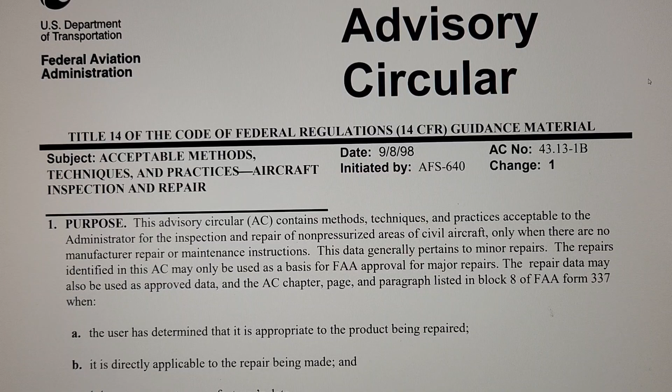All right, so back in chapter 11, they talk about ampacity and, oh god, what's the equation? I'll sketch out the equation in a second here on a separate piece of paper.

All right, so I managed to find a piece of paper where I could write out the equation for the resistance of a wire. So resistance in ohms divided by its length - this is resistance per unit length. That's the Greek letter rho - looks like a fancy P, but it's rho. That's the resistivity of the wire.

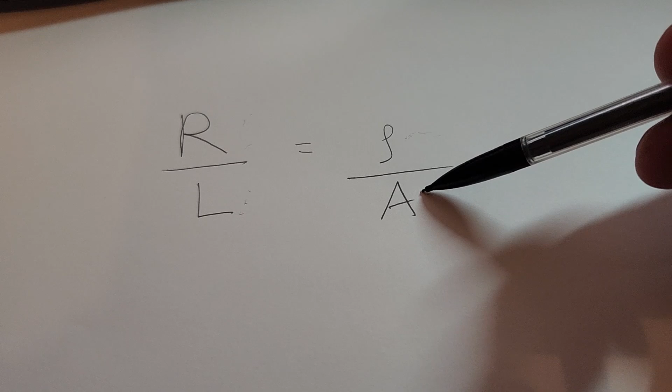This is what the manufacturer should be able to tell you. This is the cross-sectional area of the wire. You can try calculating this yourself, but what a lot of manufacturers do - because this is actually a lot easier for solid core wire, for stranded wire it's not as easy - is instead of giving you the resistivity, they'll give you resistivity divided by the cross-sectional area, which is actually the resistance per unit length.

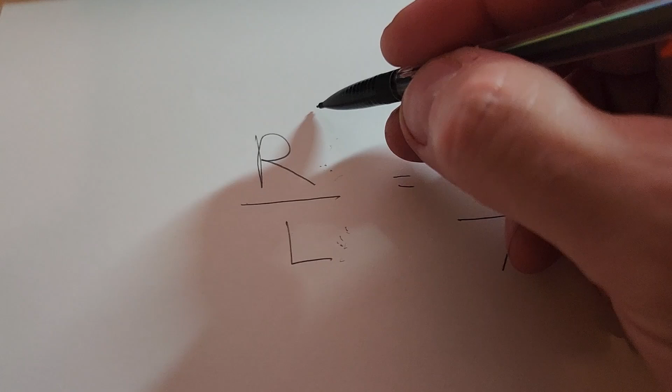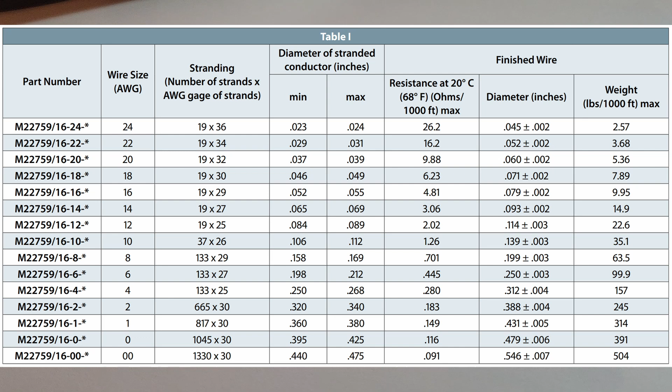This is the number you're going to probably get from the manufacturer for your wire. They'll say, hey, resistance per unit length for 8 American gauge wire, they'll give you another resistance per unit length for like 6, and so on and so forth. They're probably not going to give you the resistivity number directly, because it can sometimes be hard to figure out. So they will do their own testing and give you a resistance per unit length for a specific wire gauge, and that's what they'll typically report. All right, that's enough about that.

And then there's some corrections you can do for temperature, and then there's some other corrections you can do for wires in a bundle, and also wires that are not at sea level. So as you go higher up in altitude, the air is thinner, so the air has less ability to convect heat away from a wire the higher up you are. Not normally a problem for road vehicles, but certainly a problem for airplanes.

All right, let's talk about the battery I'm building. So yeah, quick refresher - we're on the 14 volt system. This tells us the wire length we can, well, it's not to exceed this wire length. This is the wire gauge, and these lines are constant current lines.

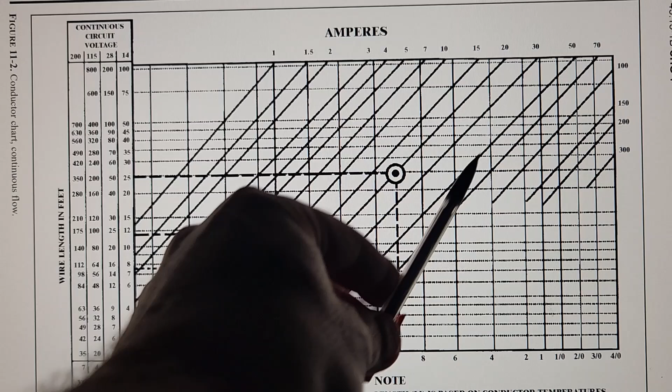So I've got about 3 feet round trip from positive and negative. If you want, you can call it 4 - I think you'll see it won't matter. And here's the 200 amp line, but remember, I've got 4 wires, cables coming off of the positive, 4 coming off the negative, 2 per cell, and I've got 2 cells in parallel, so that's 2 times 2 is 4.

So instead of 200 amps, I'm really on the 50 amp line for evaluating, do I have the right length? So let's follow the 50 amp line down to the 4 foot, and yeah, it's roughly the gauge wire I would need is about 13 gauge, which doesn't exist, so you would use 12. I've got 8, and so 8 at 4 feet - that's that intersection right there. How much current could I really draw through that?

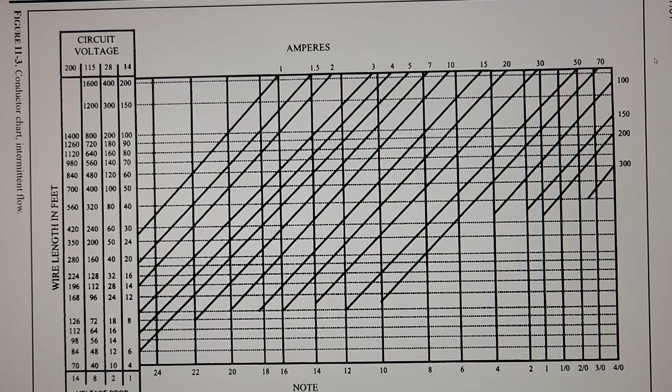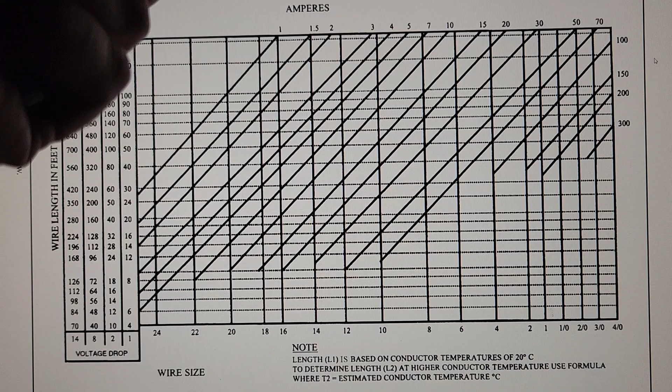So if you go to the next chart, this one's going to be intermittent flow. So this is going to be more of the peaky current, whereas the peaking, it'll just be a temporary spike, and then it comes back down to the average load. The average load is that previous chart. So yeah, 8 gauge.

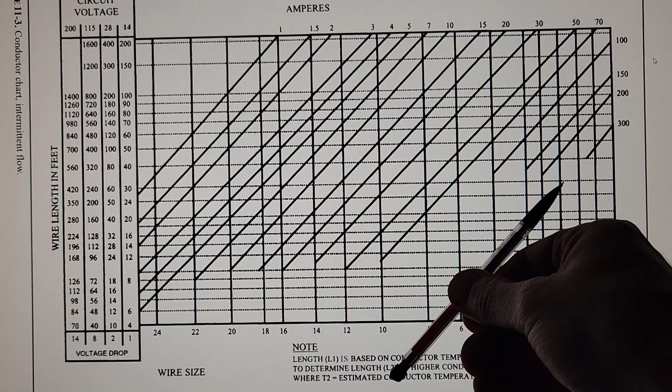Oh, the wire 4 foot's down at the bottom, so yeah, peak I can do about 240 amps through each of the battery leads. So yeah, I'm pretty good. And oh yeah, so they're allowing for 1 volt on the intermittent and a half a volt on the continuous. So I'm pretty good on the 8 gauge cables.

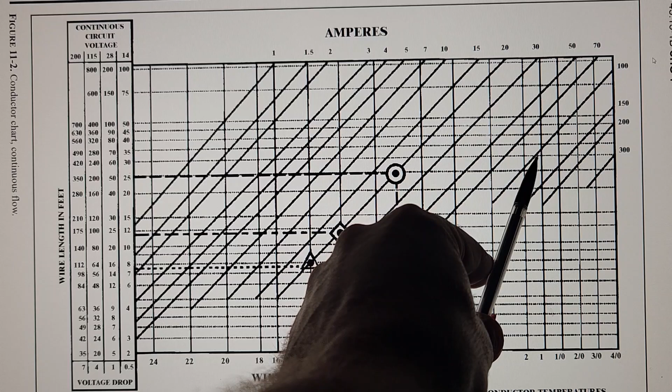Then if I go back to continuous, and I was figuring on about, let's just say 10 or 15 foot loop. Once I get the battery into a trailer or vehicle, there might be like a 10 or 15, so maybe double it, I don't know, so it's 20 or 30. So here's 20 foot and 30 foot. Let's just call 30. And I want to pull 100 amps max and then drop down. So yeah, it's in between 1 gauge and 2 gauge.

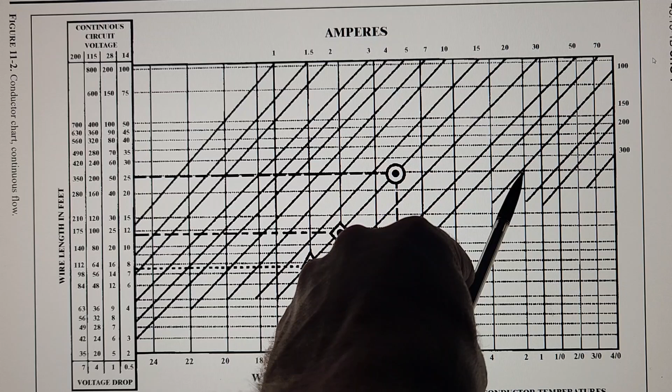I put 2 gauge wire in, but I'm not really pushing 100 amps around 30 feet of loop. If I'm pushing 100 amps, it's the load straight off of the bus bars that are going to be in the vehicle or the camper. So it's probably more like a 10-foot loop, which is this, let's see, 10 foot with 2 gauge. So here's the 2 gauge. Here's the 10-foot line.

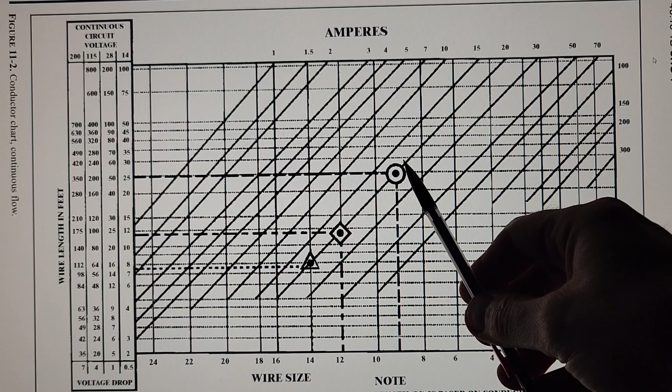And that will push about, yeah, where was it again? 210. So maybe 240 amps, which exceeds what the battery is going to pump out. So more what's moving around the cabin of the trailer or cab of the vehicle is probably more like 10 to 30 amps. So, and that's on that 30. Yeah, so let's just call it 30.

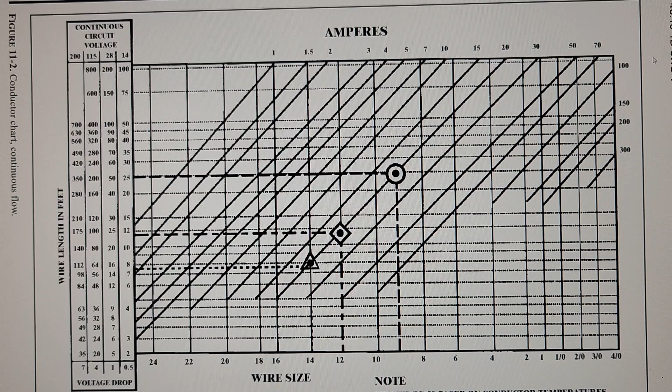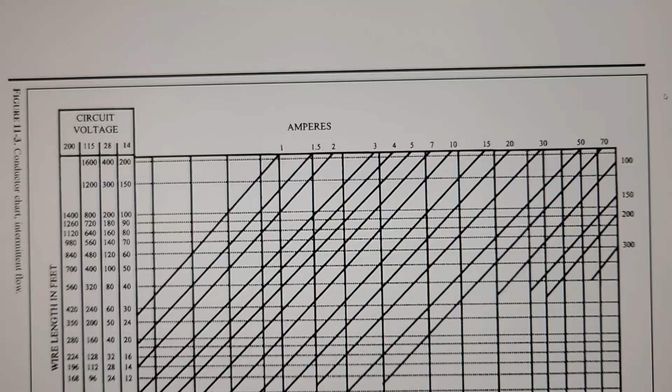Yeah, so 6 gauge, which is what I normally use to push current around the cab or cabin of the vehicle or trailer. So I just wanted to show you how all that works. There's some additional charts. So this is the intermittent current again. All right, so wires in a bundle.

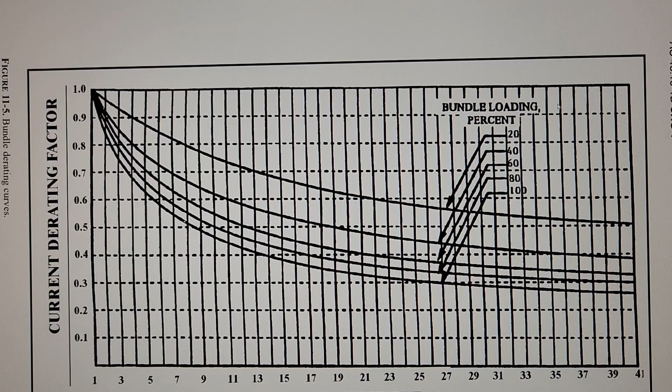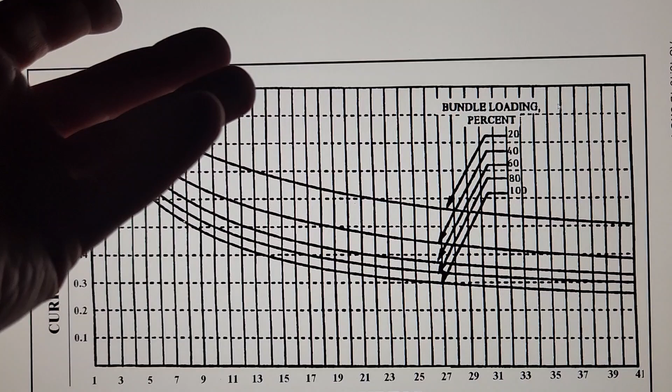So if you're running wires in a harness, you need to basically derate the wires, which in practice means you're going to have to increase the size of the wire to reduce the amount of heat being generated. The load's the load, so you're not going to reduce the load, but you might make another harness, so some of the loads on one harness, some of the loads on the other harness. But in a single bundle, derating means basically making the big wires bigger to avoid the heat problem.

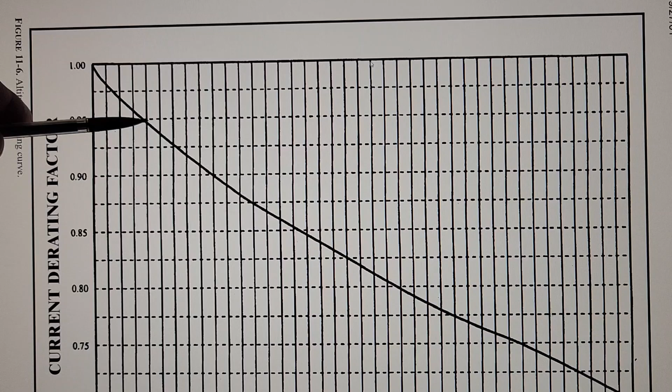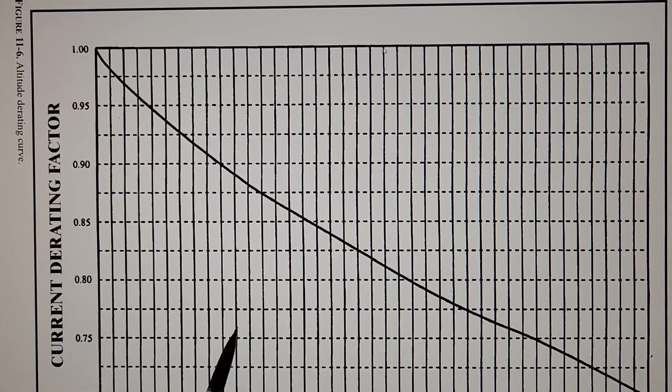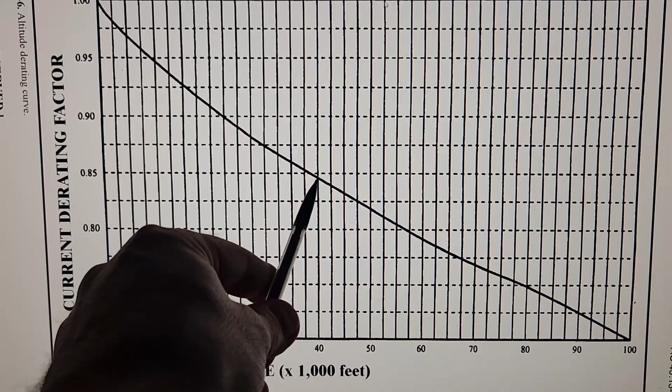Consider wires in a bundle, and then there's an altitude derating. So at 10,000 feet, you want to derate the current by 5%, which isn't a whole lot. Where airliners are flying, man, you can't see the numbers, so let's just tell you. So airliners are flying 30 to 40,000 feet. Yeah, they're having to derate their cables by 15%. So, all right, that's it for ampacity and derating. That's it.

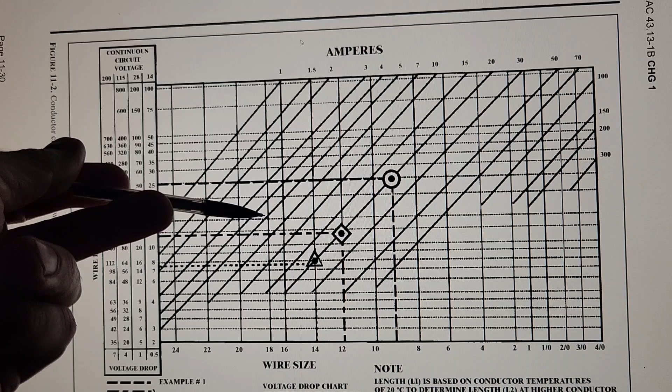Hope this was useful. To be honest, I use this chart, which is a continuous, and the next chart for intermittent current. For a lot of the wire I use, there isn't a big difference between the kinds of wire types I use. So I'll just go straight to this. This is based on a certain resistivity for milspec wiring. If you don't have milspec wiring, it's not going to be exactly the same, but it's close enough. The temperature is just going to be slightly cooler or slightly higher. It's not going to be like a huge difference.

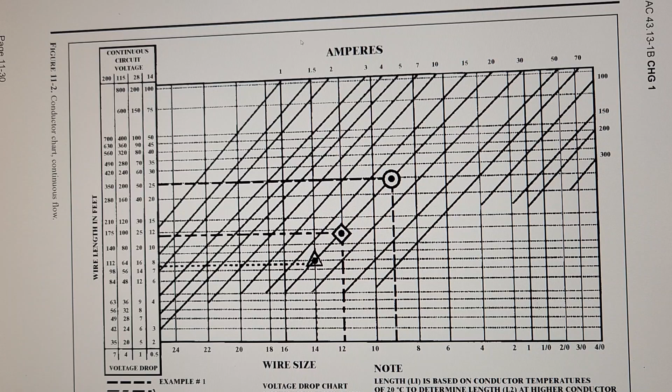This is going to get you close enough, but if you think it's an issue, go find the resistivity for your wire. You can make your own chart or just put the equation into Excel and do it that way. I just find it easier to have a printout of this laying around rather than go into Excel or a calculator. So, all right, that's it.